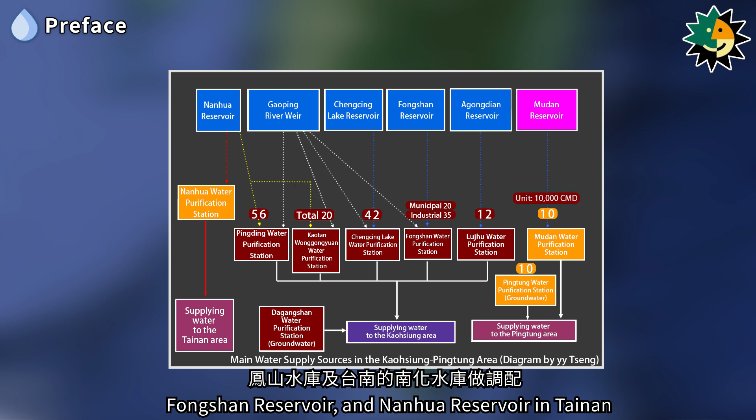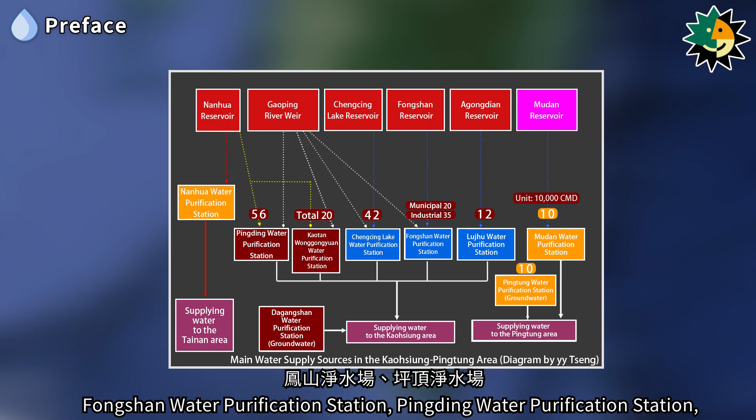The main water source for the Kaohsiung area comes from the Gaoping River Weir, supplemented by the Chengcing Lake Reservoir, Agongdian Reservoir, Fongshan Reservoir, and Nanhua Reservoir in Tainan. These sources provide water to the Chengcing Lake Water Purification Station, Lujhu Water Purification Station, Fongshan Water Purification Station, Pingding Water Purification Station, Wonggongyuan Water Purification Station, and Kaotan Water Purification Station.

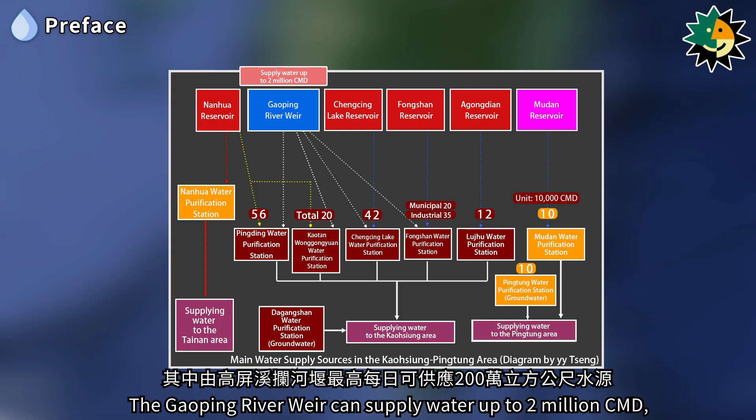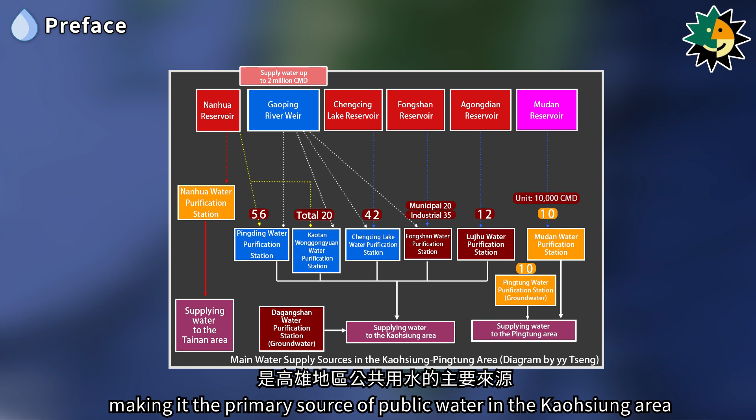The Gaoping River Weir can supply water up to 2 million cubic meters per day, providing raw water to the Pingding, Wonggongyuan, Kaotan, and Chengcing Lake Purification Stations, making it the primary source of public water in the Kaohsiung area.

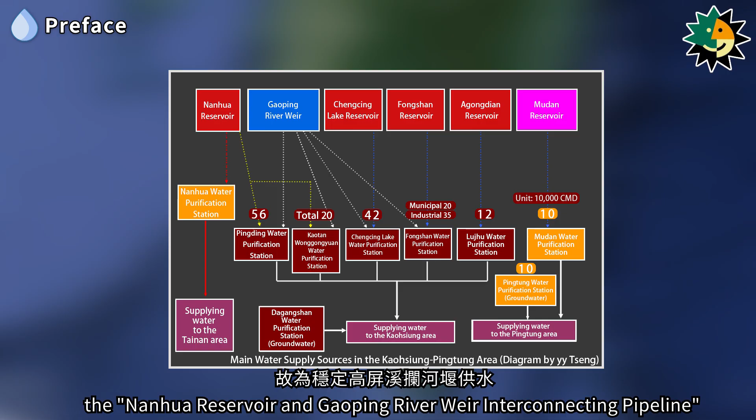Due to the significant difference in rainfall between the wet and dry seasons in southern Taiwan, the Nanhua Reservoir and Gaoping River Weir interconnecting pipeline was constructed in 2001 to stabilize water supply from the Gaoping River Weir. It was completed in 2003, with a designed daily supply capacity of 800,000 cubic meters.

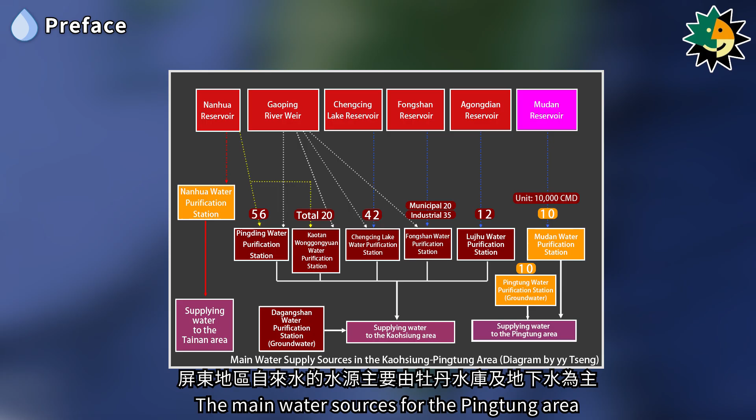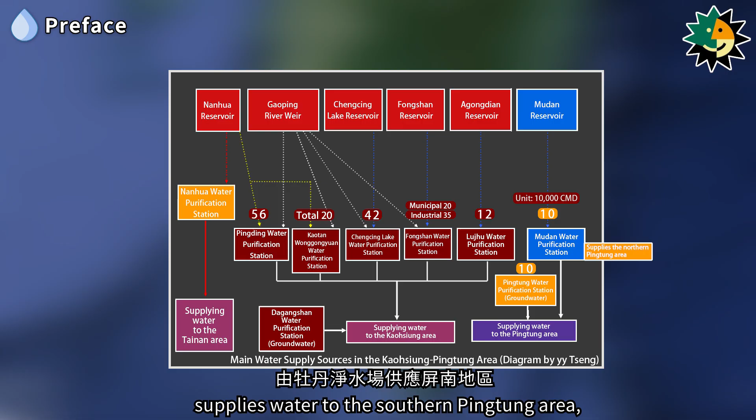The main water sources for the Pingtung area come from the Mudan Reservoir and groundwater. The Mudan Water Purification Station supplies water to the southern Pingtung area, while the Pingtung Water Purification Station supplies the northern part of the area.

The previous chapter introduced the Chengcing Lake Reservoir and Chengcing Lake Water Purification Station, Agongdian Reservoir and Lujhu Water Purification Station, Fongshan Reservoir, and Fongshan Water Purification Station. This chapter will continue by discussing the Gaoping River Weir, Pingding Water Purification Station, Wonggongyuan Water Purification Station, Kaotan Water Purification Station, and the Mudan Reservoir, Mudan Water Purification Station, and Pingtung Water Purification Station in the Pingtung area.

The water sources for Pingding, Wonggongyuan, and Kaotan Water Purification Stations primarily come from the Gaoping River Weir. Also known as the Dashu Weir, it is located in Dashu district of Kaohsiung City, 2 kilometers upstream of the Gaoping Railway Bridge on the lower reaches of the Gaoping River.

The Gaoping River Weir was constructed to address the significant difference in rainfall between the wet and dry seasons in southern Taiwan. To stabilize the regional water supply, construction began in 1994 and was completed in 1999, making it an important water resource project in southern Taiwan, following the Nanhua and Mudan reservoirs.

The water intake point for the Gaoping River Weir is upstream of the confluence of the Wuluo River and Gaoping River. The weir can supply water year-round, with an initial supply capacity of 1 million cubic meters per day and a maximum supply capacity of 2 million cubic meters per day, making it the primary source of public water supply in the Kaohsiung area.

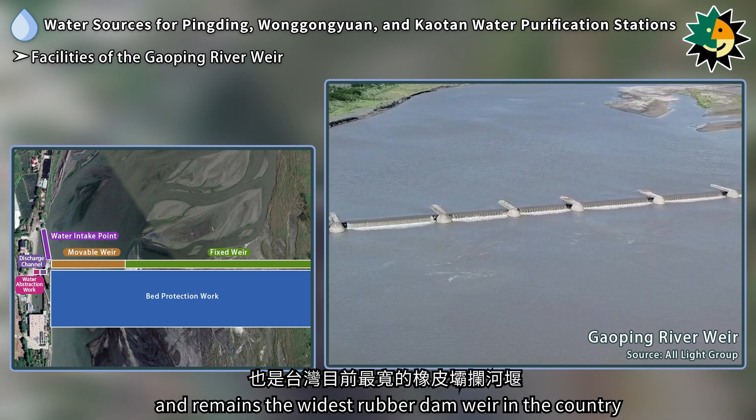The Gaoping River Weir is Taiwan's first rubber dam weir and remains the widest rubber dam weir in the country. It is designed to raise the water level but has no water storage function. The intake level is set at an elevation of 16.4 meters, with a designed water intake capacity of 35 cubic meters per second.

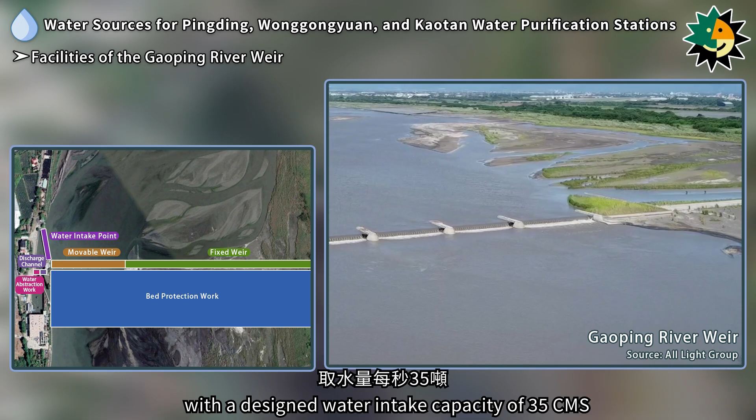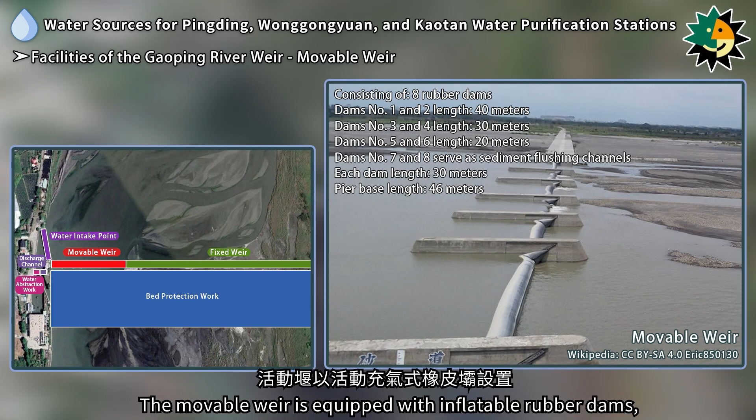The weir structure is 960 meters long, divided into a 286-meter movable weir section and a 674-meter fixed weir section. The movable weir is equipped with inflatable rubber dams, consisting of a total of 8 rubber dams. The fixed weir is a concrete structure, 674 meters in length. There are 3 bed protection structures, each 45 meters wide, spaced 100 meters apart.

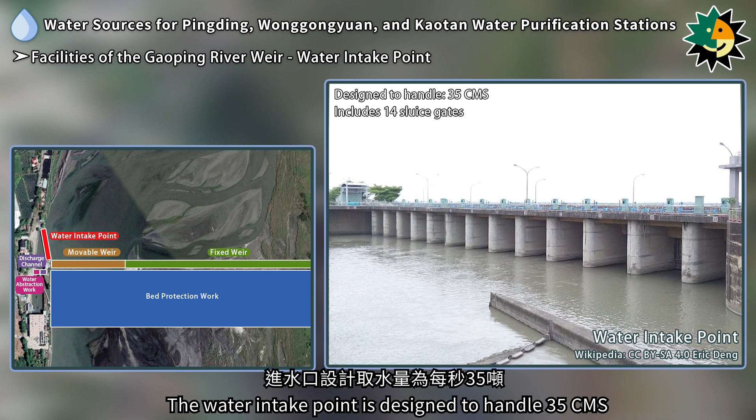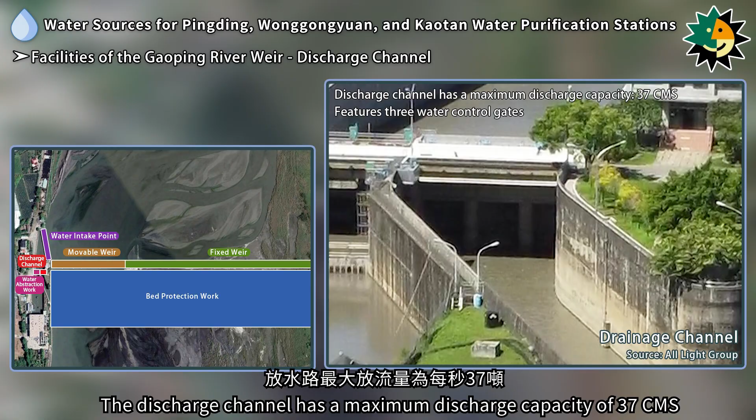The water intake point is designed to handle 35 cubic meters per second and includes 14 sluice gates. The water abstraction work is designed to handle 35 cubic meters per second and features 3 water control gates, followed by a grit chamber. The discharge channel has a maximum discharge capacity of 37 cubic meters per second and features 3 water control gates. It discharges turbid water back into the Gaoping River.

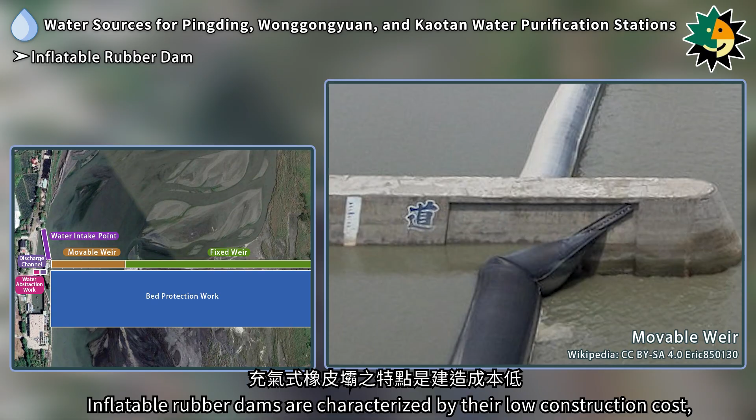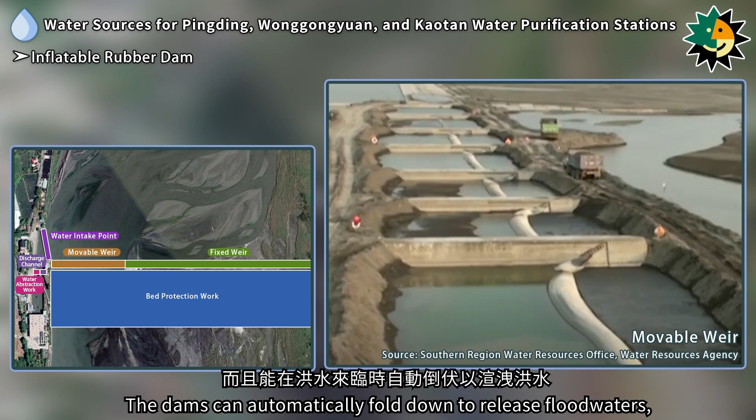Inflatable rubber dams are characterized by their low construction cost, ability to avoid blocking water, leak resistance, high seismic resilience, low foundation requirements, and short construction period. The dams can automatically fold down to release floodwaters, preventing upstream water levels from rising too high and causing flooding. However, they are more prone to damage and wear, resulting in a shorter lifespan compared to concrete weirs.

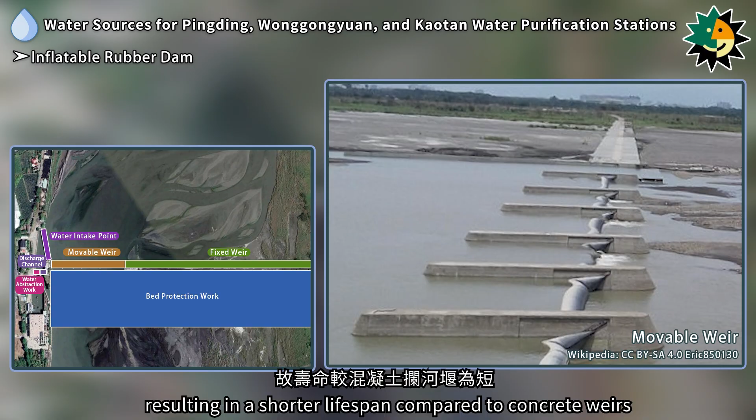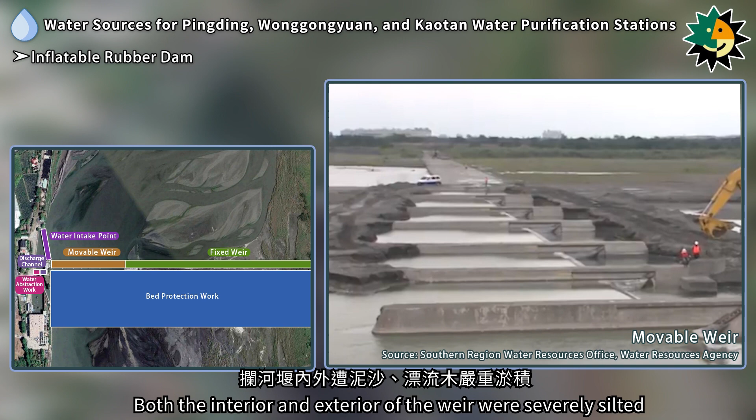In 2009, Typhoon Morakot brought torrential rains to the Gaoping River basin, submerging the Gaoping River Weir. Both the interior and exterior of the weir were severely silted and clogged with driftwood. Among the 8 rubber dams, 3 were punctured by driftwood and were replaced in early 2010.

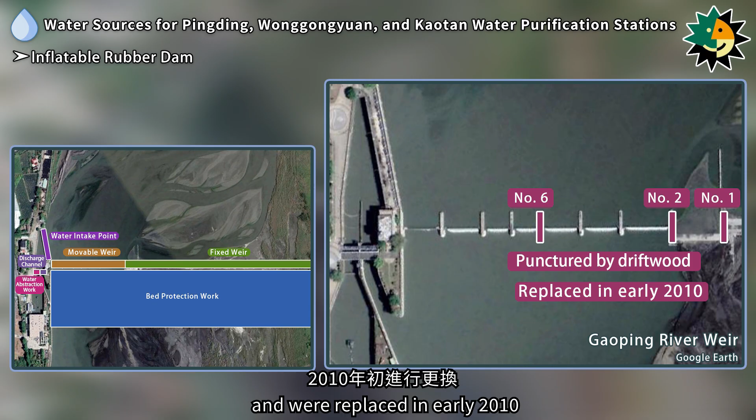After the completion of the Nanhua Reservoir, in addition to supplying raw water to the Nanhua Water Purification Station, an interconnecting pipeline with the Gaoping River Weir was constructed to stabilize its water supply. During the wet season, water is diverted from the Jiaxian Weir to fill the Nanhua Reservoir. When the Gaoping River Weir's supply is insufficient, water is transferred from the Nanhua Reservoir.

The Nanhua Gaoping interconnecting pipeline, completed in 2003, is 57.7 kilometers long, with a total supply capacity of 800,000 cubic meters per day. It was built to address water shortages during the Gaoping River's dry season. The pipeline operates entirely by gravity, making it an energy-efficient water resource facility.

In 2006, additional lining was installed in parts of the pipeline, and 3 pressure-reducing stations were added along the route. These upgrades were completed in March 2007, significantly improving the region's capacity to respond to water shortages.

Pingding Water Purification Station, located in Dashu Township, was originally constructed in 1909. Its predecessor was a water purification station established during the Japanese colonial period in Gaoping Village, serving as Kaohsiung's first headwater point. Initially, the station had a water output of 140,000 cubic meters per day. In 1999, the first phase of an expansion project was completed, increasing the designed output to 800,000 cubic meters per day.

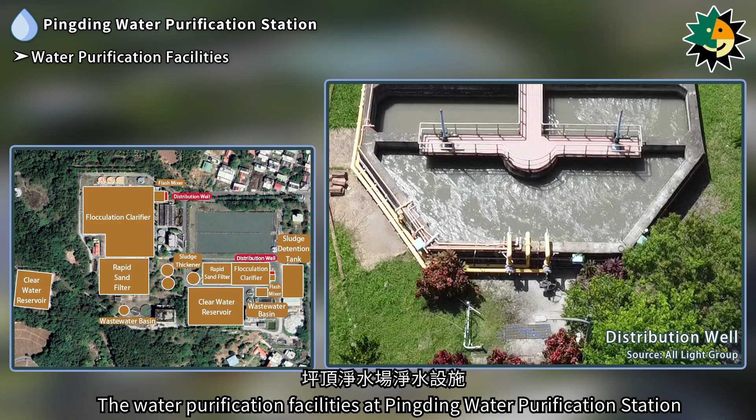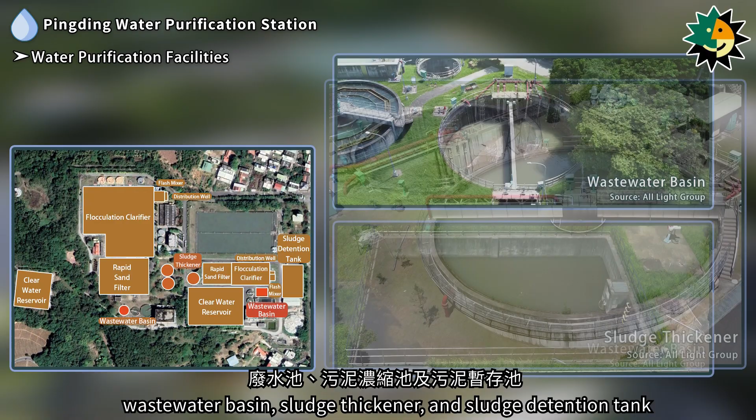The water purification facilities at Pingding Water Purification Station include a distribution well, flash mixer, flocculation clarifier, rapid sand filter, clear water reservoir, wastewater basin, sludge thickener, and sludge detention tank.

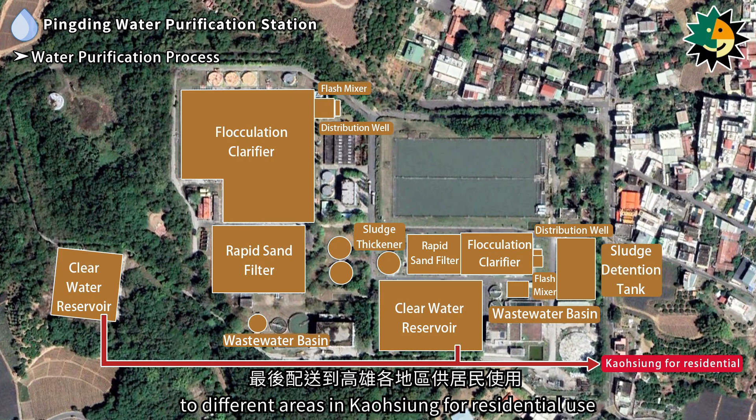The water purification process at Pingding Water Purification Station involves drawing raw water from the Gaoping River Weir and the Lujhu water station, which is then sent to the distribution well. The water is subsequently distributed to various flash mixers, passes through the flocculation clarifier, rapid sand filter, and chlorine disinfection system before being stored in the clear water reservoir. Finally, the purified water is distributed to different areas in Kaohsiung for residential use.

The main water supply areas for Pingding Water Purification Station include Nanzi District, Zuoying District, and Northern Kaohsiung, as well as Dashu, Renwu, Gangshan, and Fongshan districts in Kaohsiung City.

Wonggongyuan Water Purification Station was constructed in 1938 and originally served as Kaohsiung's second headwater point. Its water supply involved drawing subsurface water from the Gaoping River and pumping it into shallow wells at the station. The initial design had a daily output of 8,350 cubic meters, sufficient to supply 50,000 residents. After being taken over by the Kaohsiung city government in 1945, the station underwent expansions and improvements, increasing its output to 15,000 cubic meters per day.

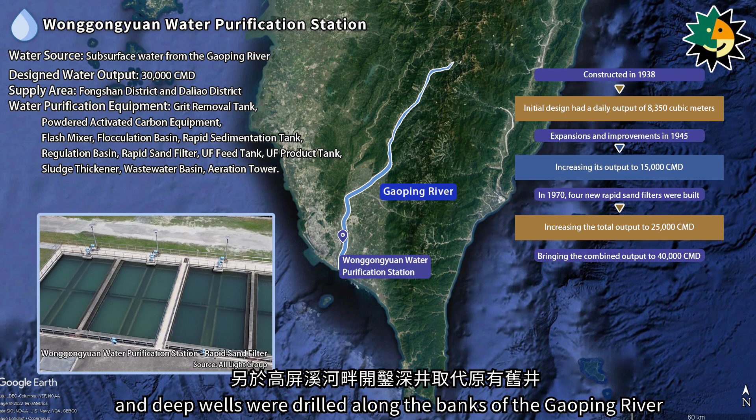In 1970, 4 new rapid sand filters were built, and deep wells were drilled along the banks of the Gaoping River to replace the old wells, increasing the total output to 25,000 cubic meters per day, bringing the combined output to 40,000 cubic meters per day.

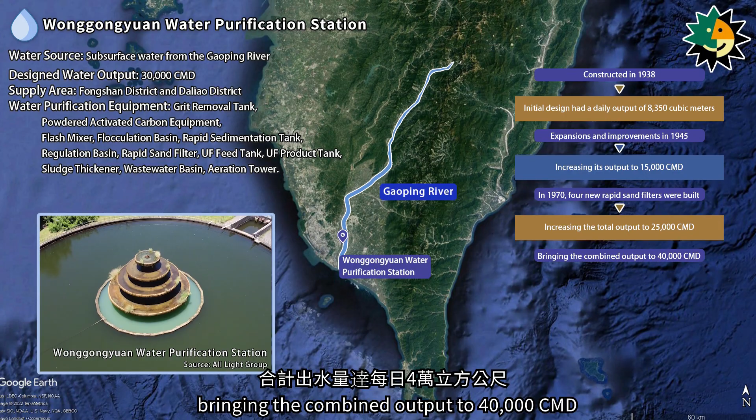In 1996, Wonggongyuan Water Purification Station was merged with Kaotan Water Purification Station for unified management. Due to aging wells and difficulty in finding new ones, the water source was switched to subsurface water from the Gaoping River Weir, while groundwater became a supplementary source. Some of the raw water drawn was sent to Kaotan Water Purification Station for further treatment. In 2007, advanced water treatment equipment was added to improve drinking water quality, with an output of 30,000 cubic meters per day.

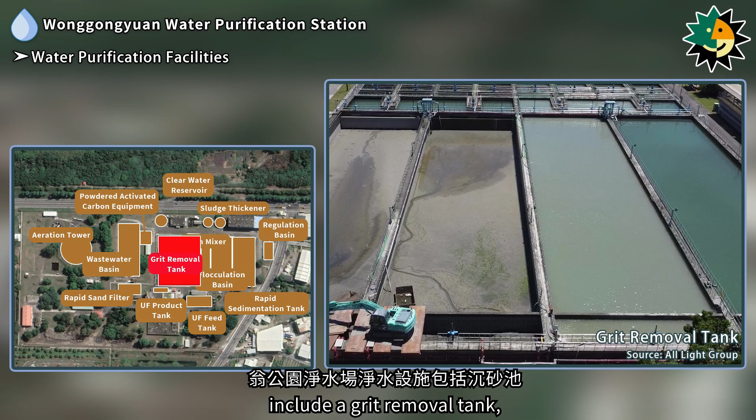The water purification facilities at Wonggongyuan Water Purification Station include a grit removal tank, powdered activated carbon equipment, flash mixer, flocculation basin, rapid sedimentation tank, regulation basin, rapid sand filter, UF feed tank, UF product tank, clear water reservoir, sludge thickener, wastewater basin, and aeration tower.

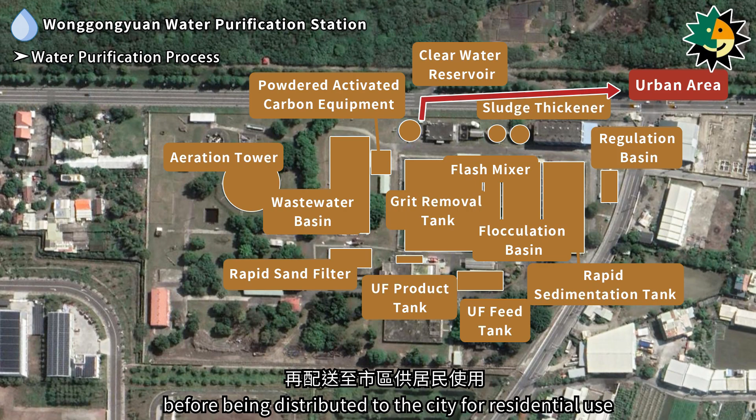The water purification process at Wonggongyuan Water Purification Station starts by drawing raw water from the Gaoping River Weir into the grit removal tank. The water is treated through a series of facilities, including the flash mixer, flocculation basin, rapid sedimentation tank, regulation basin, and rapid sand filter. It then passes through advanced purification units like UF and LPRO to improve water quality. The purified water is stored in the clear water reservoir before being distributed to the city for residential use. The main water supply areas for Wonggongyuan Water Purification Station include Fongshan District and Daliao District.

Kaotan Water Purification Station is located in Daliao Township and was constructed in 1972. The original water source was deep wells in the Daliao area. Initially under the jurisdiction of the Chengcing Lake Industrial Water Treatment Plant, the station had a designed output of 152,000 cubic meters per day, primarily supplying the Kaohsiung-Pingtung Industrial Park. In 1974, it was merged with the Water Corporation and redesignated as Kaotan Water Treatment Plant.

In 1993, in line with the Water Corporation's policy of separating industrial and residential water supplies, additional facilities, including rapid sand filters, clear water reservoirs, and flocculation clarifiers, were constructed in 1995, increasing the output by 100,000 cubic meters per day, bringing the total designed output to 252,000 cubic meters per day.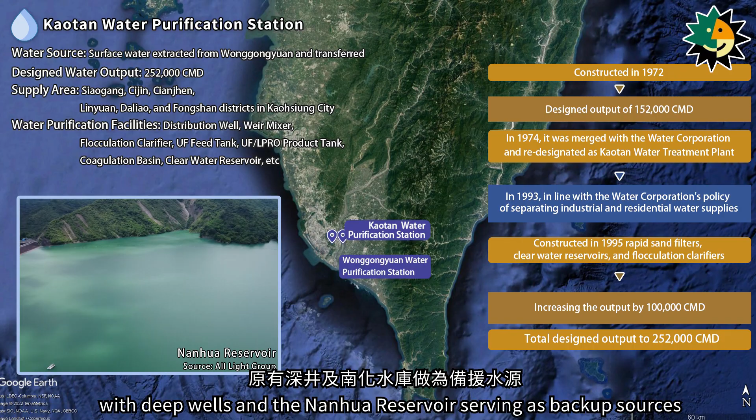However, long-term extraction from deep wells led to a decline in groundwater levels. In 1996, Wonggongyuan Water Purification Station was merged into Kaotan Water Purification Station, and the water source was shifted to surface water from the Gaoping River Weir, transferred via a regulation basin to Kaotan Water Purification Station, with deep wells and the Nanhua Reservoir serving as backup sources.

In 2007, advanced water treatment equipment was installed, and the current designed output is 252,000 cubic meters per day, with a maximum capacity of 270,000 cubic meters per day, supplying water to over 540,000 residents.

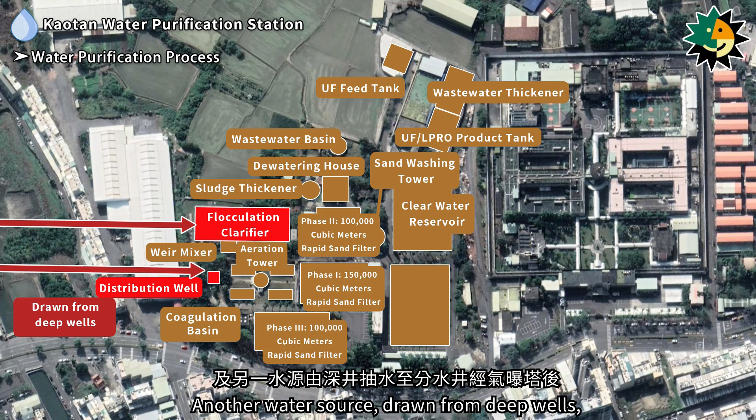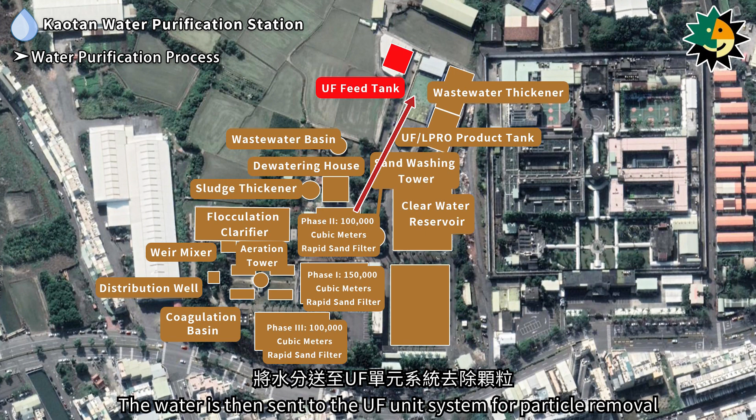The water purification process at Kaotan Water Purification Station involves receiving raw water from Wonggongyuan Water Purification Station. The raw water is first treated in a flocculation clarifier. Another water source, drawn from deep wells, is processed in a distribution well and aeration tower before entering the coagulation basin and rapid sand filters. The water is then sent to the UF unit system for particle removal and the LPRO system for ammonia-nitrogen removal.

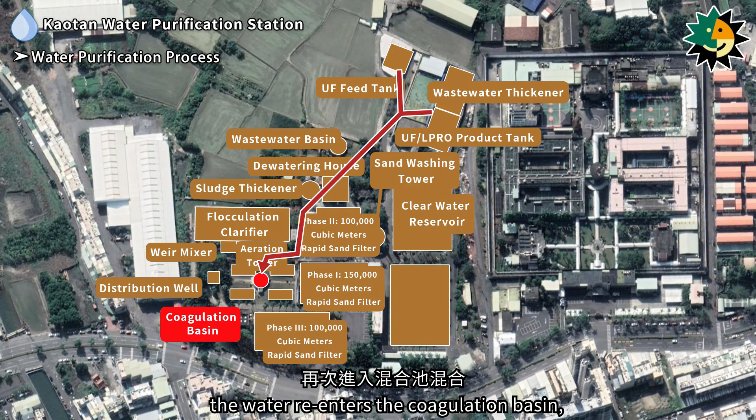After filtration through both systems, the water re-enters the coagulation basin, and the treated water is stored in the clear water reservoir before being distributed to urban areas for residential use. The main supply areas for Kaotan Water Purification Station include Siaogang, Cijin, Cianjhen, Linyuan, Daliao, and Fongshan districts in Kaohsiung City.

Mudan Reservoir serves as the primary water source for Mudan Water Purification Station. It is located in the valley of Sichong River in Mudan Township, southern Pingtung County, and was completed at the end of 1995. Mudan Reservoir collects water from the upstream tributaries of Mudan River and Rureng River, primarily supplying the area from Donggang to the Hengchun Peninsula. The reservoir has a capacity of 39.4 million cubic meters and irrigates an area of 500 hectares, supplying raw water to Mudan Water Purification Station with 100,000 cubic meters per day.

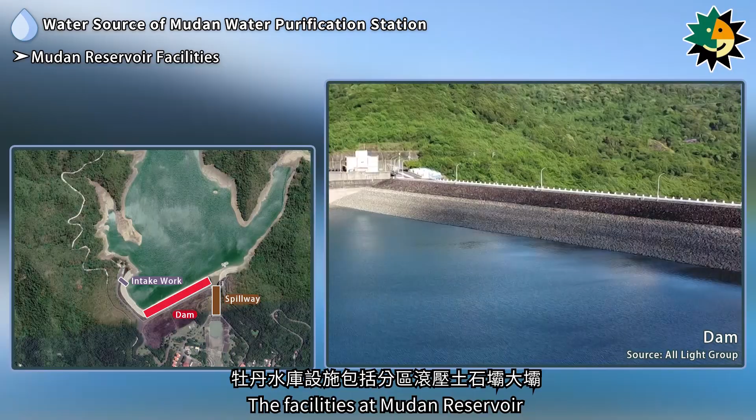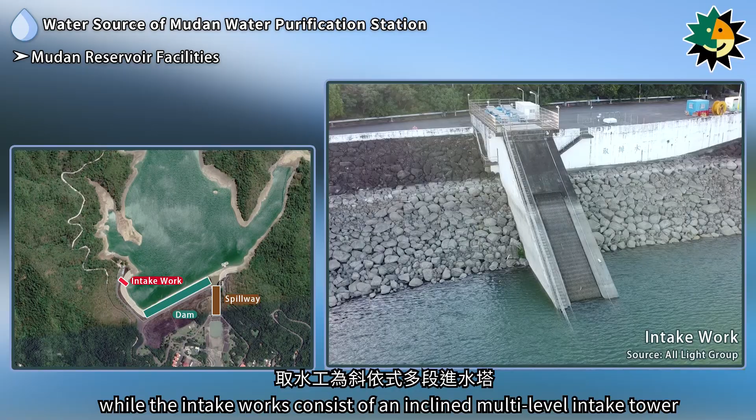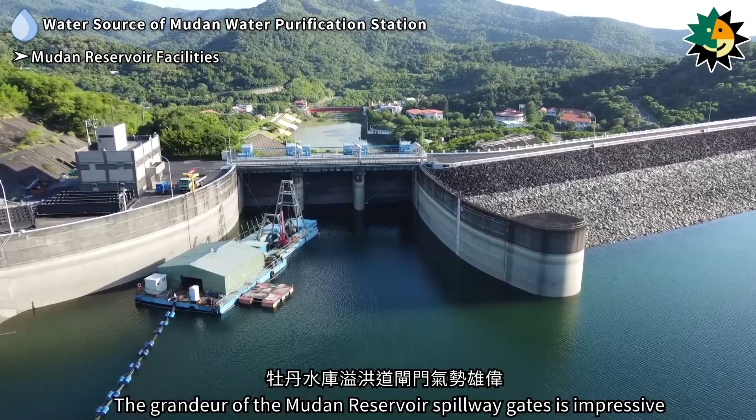The facilities at Mudan Reservoir include a zoned rolled fill embankment dam. The spillway is a gated controlled overflow work connected to a discharge chute, while the intake works consist of an inclined multi-level intake tower located on the right bank of the dam, which connects to a water tunnel. The grandeur of the Mudan Reservoir spillway gates is impressive. Walking along the top of the dam offers sweeping views of Shimen Village. From a distance, the entire reservoir reflects white clouds and green mountains on its calm waters, creating a stunning landscape.

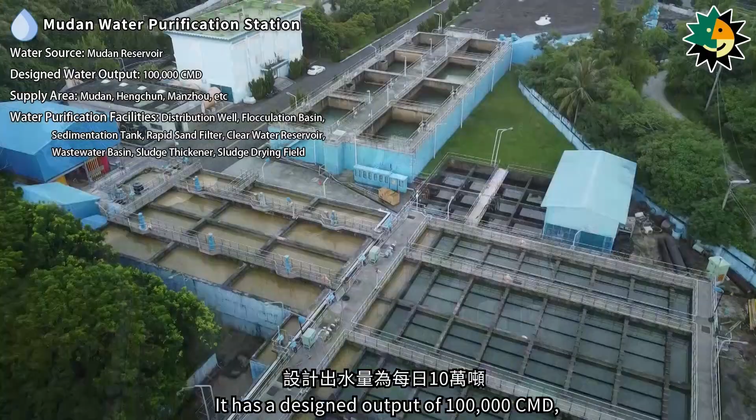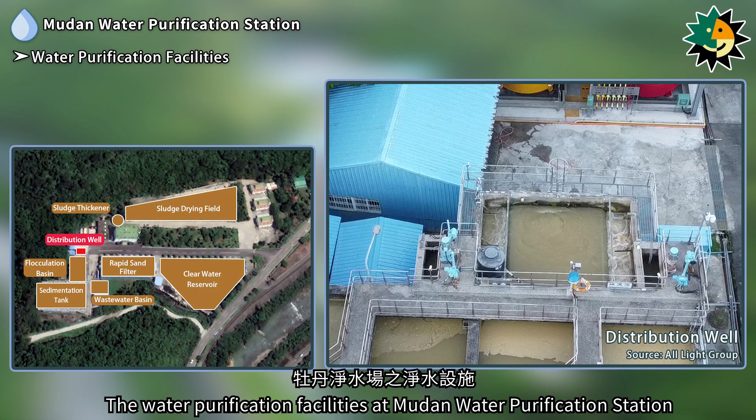Mudan Water Purification Station is located in Mudan Township, Pingtung County, and sources its water from Mudan Reservoir. It has a designed output of 100,000 cubic meters per day, primarily supplying the southern Pingtung area. The water purification facilities at Mudan Water Purification Station include a distribution well, flocculation basin, sedimentation tank, rapid sand filter, clear water reservoir, wastewater basin, sludge thickener, and sludge drying field.

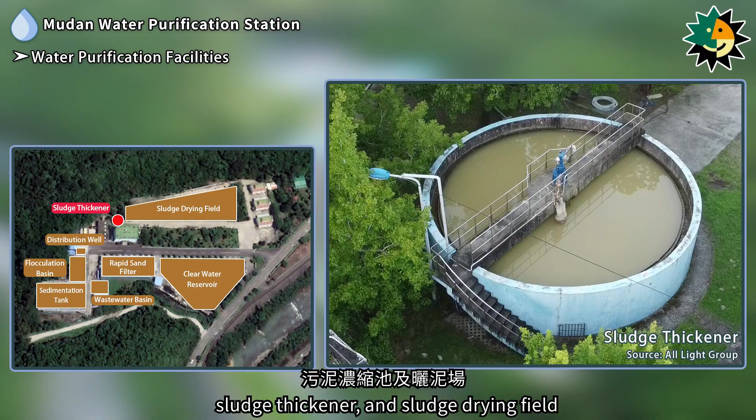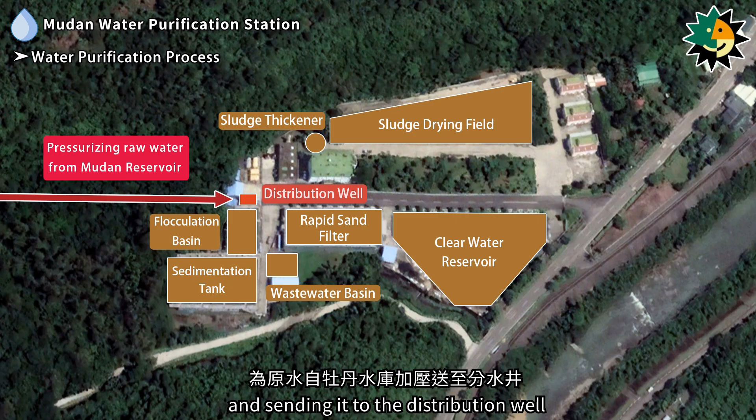The water purification process at Mudan Water Purification Station involves pressurizing raw water from Mudan Reservoir and sending it to the distribution well. After undergoing flocculation, sedimentation, and rapid filtration, the water is sent to the clear water reservoir. It is then distributed by gravity through two lines, one to the north and one to the south, to supply water to residential areas.

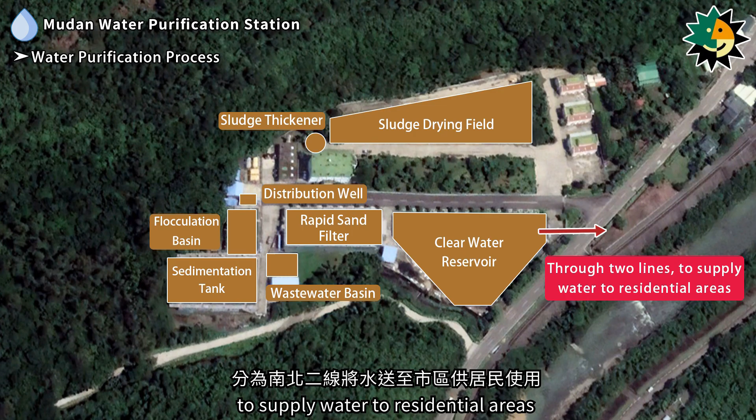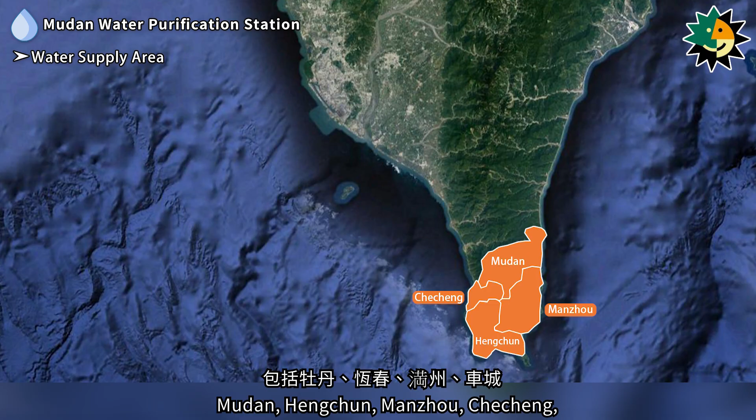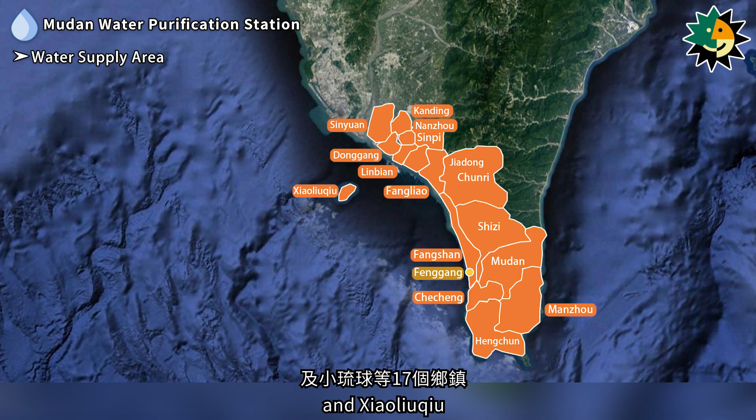The water supply area of Mudan Water Purification Station includes 17 townships: Mudan, Hengchun, Manzhou, Checheng, Fenggang, Fangshan, Shizi, Chunri, Fangliao, Sinpi, Kanding, Nanzhou, Jiadong, Linbian, Donggang, Sinyuan, and Xiaoliuqiu. The pipeline network extends over 149 kilometers.

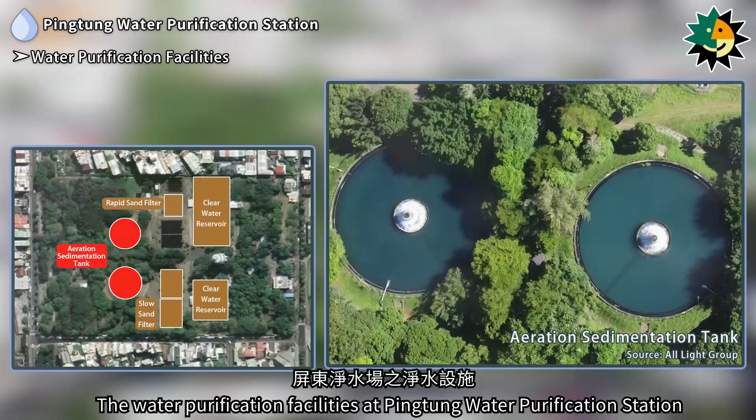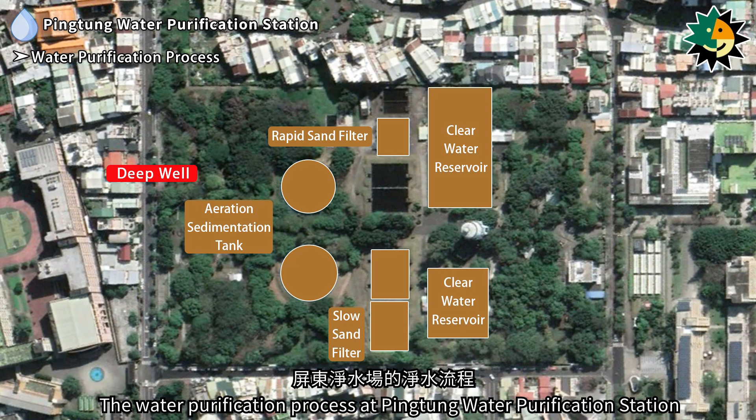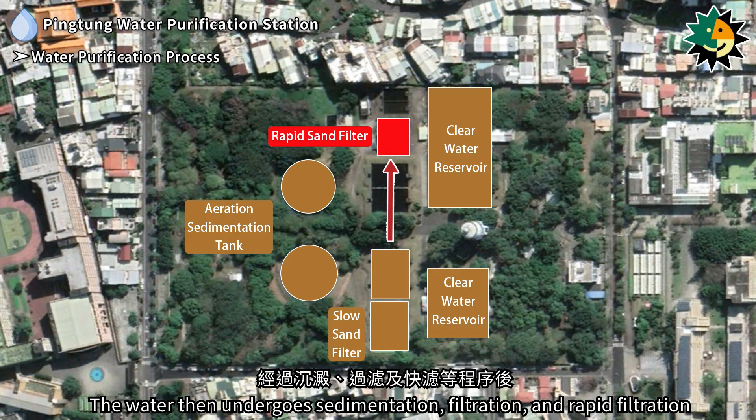The water purification facilities at Pingtung Water Purification Station include aeration sedimentation tanks, slow sand filters, rapid sand filters, and a clear water reservoir. The water purification process involves extracting raw water from deep wells within the facility and sending it to the aeration sedimentation tank. The water then undergoes sedimentation, filtration, and rapid filtration before being stored in the clear water reservoir and distributed to the city for residential use. The main water supply areas include Pingtung City, Changzhi Township, and Wandan Township.

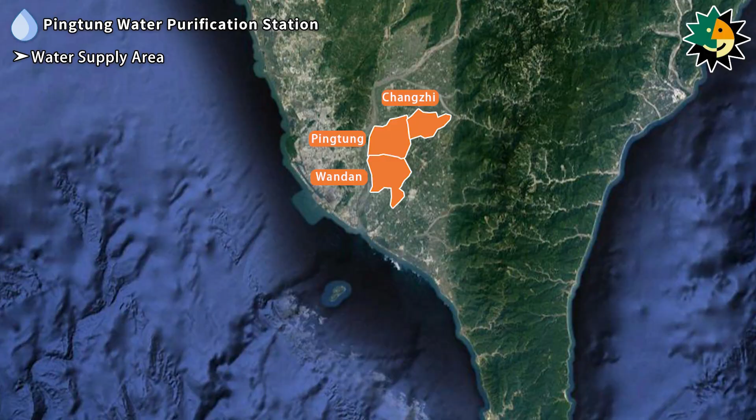During the Japanese colonial period, several water supply systems were established in the Kaohsiung-Pingtung area, including the Kaohsiung Water Source, Cishan Waterworks, Fongshan Waterworks, Gangshan Waterworks, and Agou Waterworks. However, with the rapid population growth and industrial development in the area, the original waterworks became insufficient. After World War II, the water systems from the Japanese colonial period were expanded into facilities like the Pingtung Water Purification Station, Wenggongyuan Water Purification Station, and Pingding Water Purification Station.

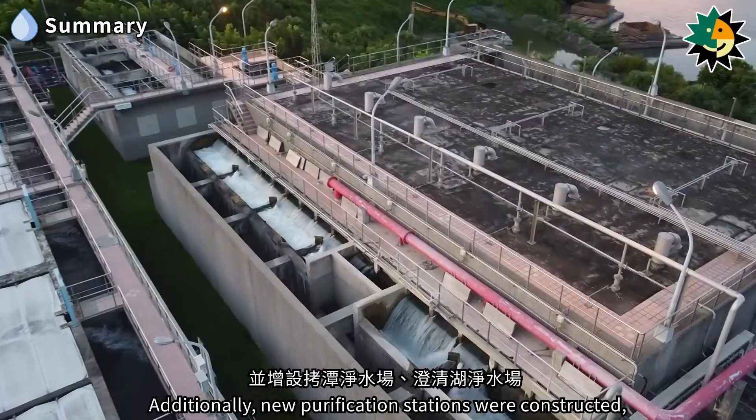Additionally, new purification stations were constructed, including Kaotan, Chengcing Lake, Fongshan, Lujhu, and Mudan Water Purification Stations. In terms of water sources, several reservoirs were successively built, including Chengcing Lake Reservoir, Agongdian Reservoir, Fongshan Reservoir, Mudan Reservoir, Gaoping River Weir, and the Nanhua Reservoir interconnecting pipeline, to ensure a more stable and adequate water supply.

The waterworks in the Kaohsiung-Pingtung area have spanned over a century, contributing to the industrial growth and economic prosperity of the area. As we enjoy the conveniences of modern life, let us not forget to appreciate the long-standing efforts and dedication of the public water supply personnel.